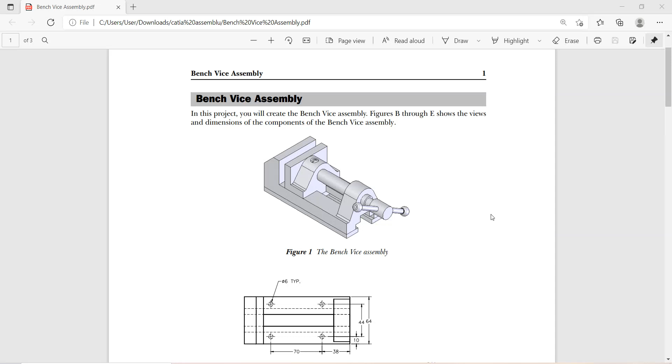In this bench vice assembly today, we are going to see how to make this set screw 2.

For that, first open CATIA, then go on Start, then Mechanical Design, and then Part Design. After that, name it set screw 2 and click on OK.

On this window you have to select any plane and then go on the sketch option, and now use this profile command to make the sketch. You can make it your own way; I am making it step by step.

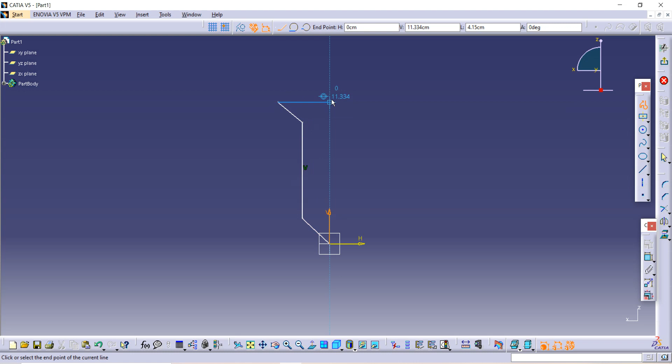This is how we have completed our sketch, and I am now using this constraint option to give dimensions to it. The angle between this slant line and the vertical line is given as 60, and the distance between this point and this point is given as 18.

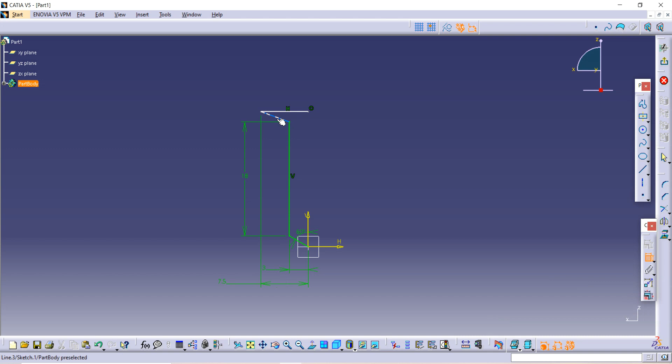Now the distance between this vertical line and the vertical axis is given as 6 divided by 2, that is 3. The external point with the central axis is given as 15 divided by 2, that is 7.5. And the angle between this slant height and this vertical line on this side is given as 45.

This is how our whole sketch is shown in green color. So we can go on Exit Workbench from here, and now use this Shaft command to revolve it. Select the axis and then click on OK. This is how we have completed our half assembly.

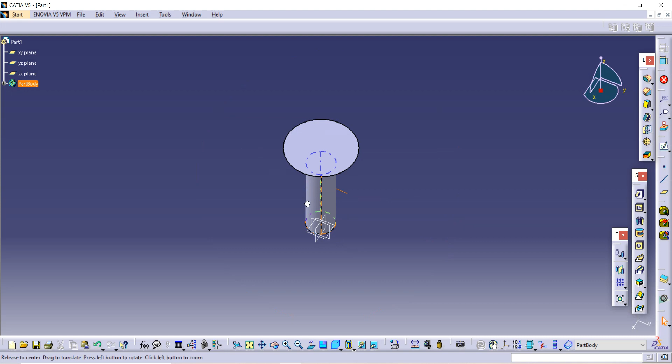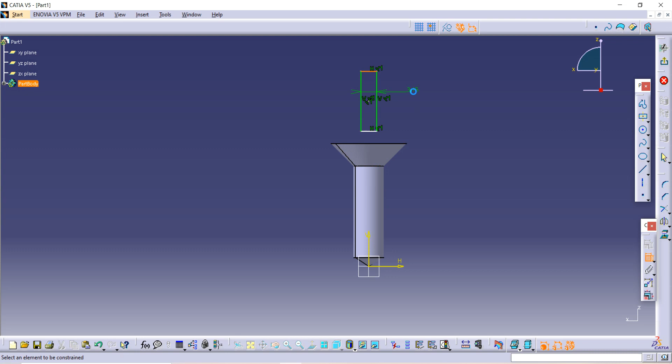Now you have to select any plane which will be vertical, and then go on the sketch option, and use this center rectangle to make one center rectangle from the center of this axis. Now use this constraint option: give the dimension here as 2, length is 2. For the distance, drag it down, and again use the constraint option. The distance between this line and this line is given as 2, and then click on OK.

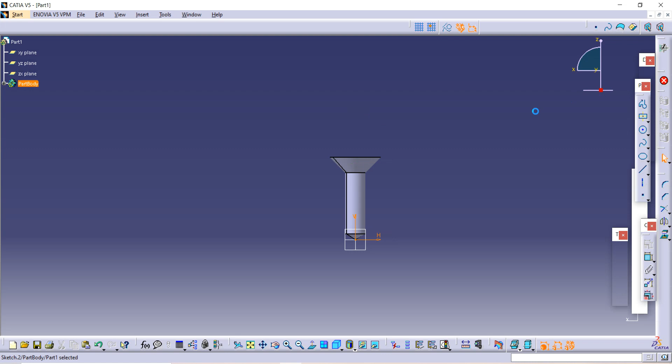After that, go on Exit Workbench, and now use this Pocket command and take the depth as whatever you want, and then again use Mirrored extent and click on OK. This is how we have completed our set screw 2.